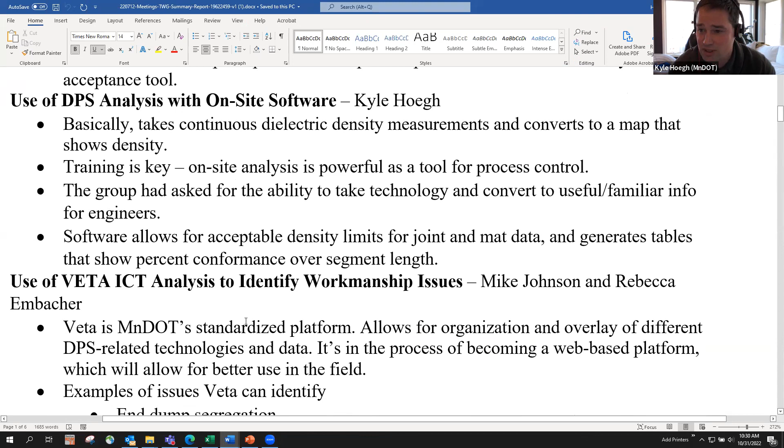I think I'm going to grab the screen very quickly and then we'll get into Brian's presentation. I did want to just really quickly go through some of the stuff we went over in our last meeting, as a quick reminder for the group. So this was our July 12th meeting. We had a lot of the same people here and went through some of the on-site software. Training is key, giving some examples of how the technology can be used to actually fix some workmanship issues, which is really one of the major goals of this technology, to help us get information to the contractors when they're building the pavement to improve from the very beginning.

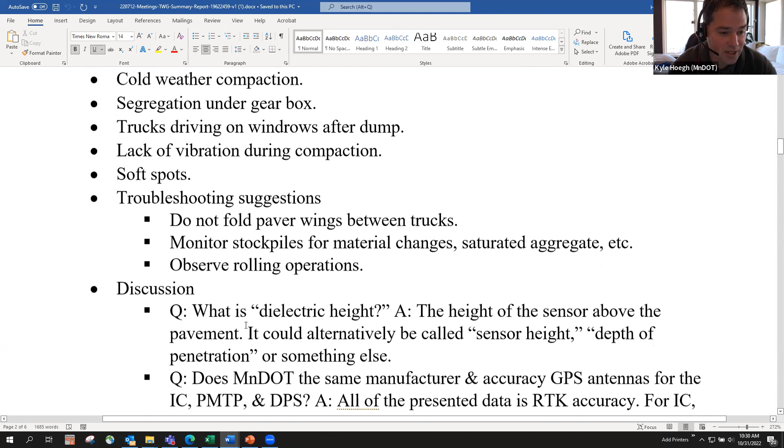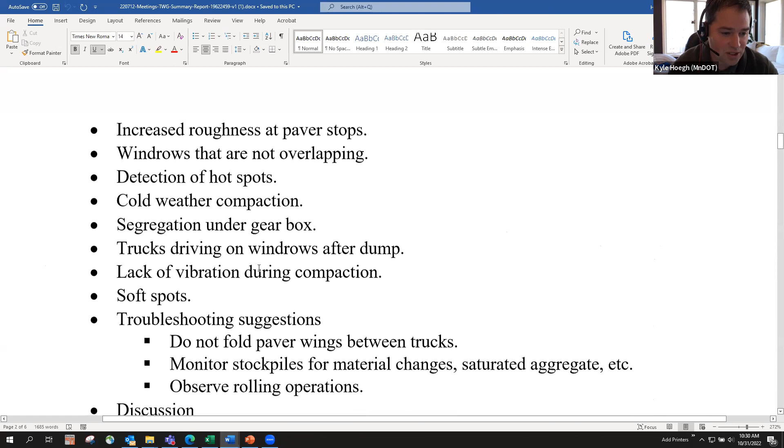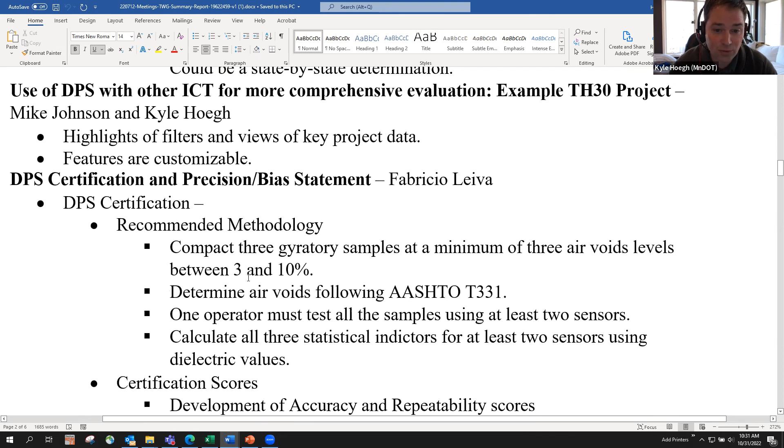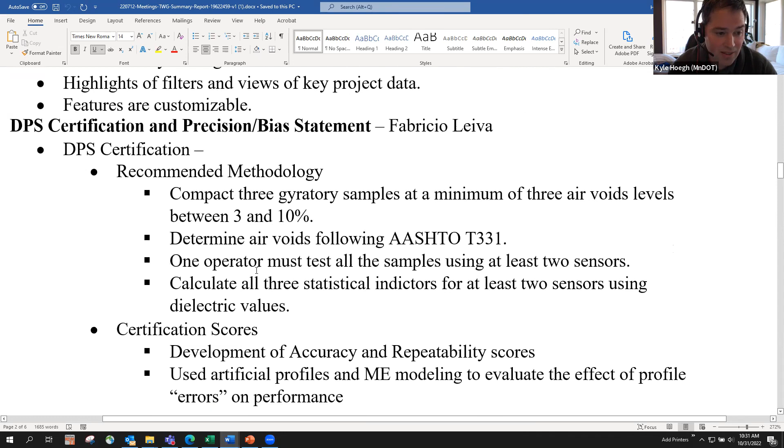And we also went through some of the more detailed applications using Veta software, where we can bring in some of the other intelligent construction technologies like thermal and intelligent compaction and things like that, and saw some really good examples and highlights of being able to identify what in the construction process was causing the low density locations and getting those fixed. So not those specific spots, but the operation that was leading to the lower densities. And then Fabricio actually did a great presentation on the DPS certification and some of the work he did at NCAT. And that's actually going to be a topic that Dennis is going to expand upon today.

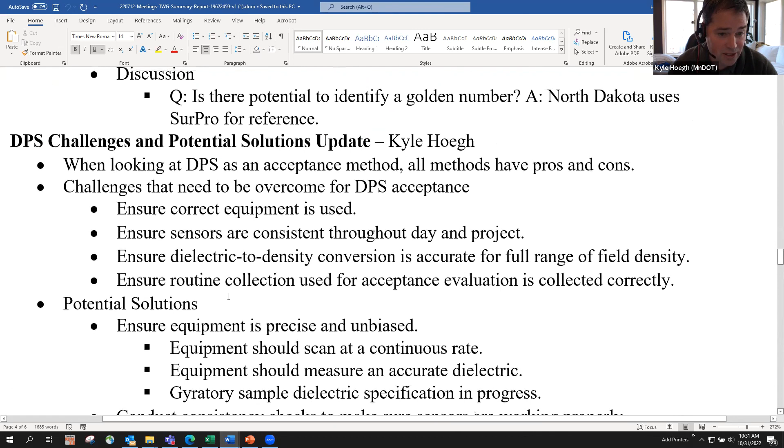And then we went through some of the challenges, and Robert Hinman also expanded on some of those and some potential solutions for this technology.

So, but we're already 11 minutes into Brian's presentation. We'd like to be as informal as possible while making sure people have their time. So definitely, Brian, don't feel rushed. We have some buffers in there for discussion and things like that. So go ahead and give your full presentation, Brian, if you don't mind. Thanks, Kyle.

I think I have some ability in here to help things along. So thanks, everybody. Thanks for the opportunity to share what we've been working on. Kyle asked me to talk a little bit about our initial evaluation of the DPS system, and the one we are using in particular is the one from GSSI. I'm also working with Hari Nair, who I think is traveling to maybe Salt Lake City today, but Hari and I have been working together on this project so far.

So a little bit of background about what we've been doing. We've got a decent history, I think, with GPR in general, a little more than 15 years using it for bridge surveys, bridge decks, pavements, things like that. Last year we purchased, using STIC funding from Federal Highways, so thank you to those folks, the RDM unit, again from GSSI. And we were able to do some testing on 5 field projects last year after getting that piece of equipment as part of a phase 1 study.

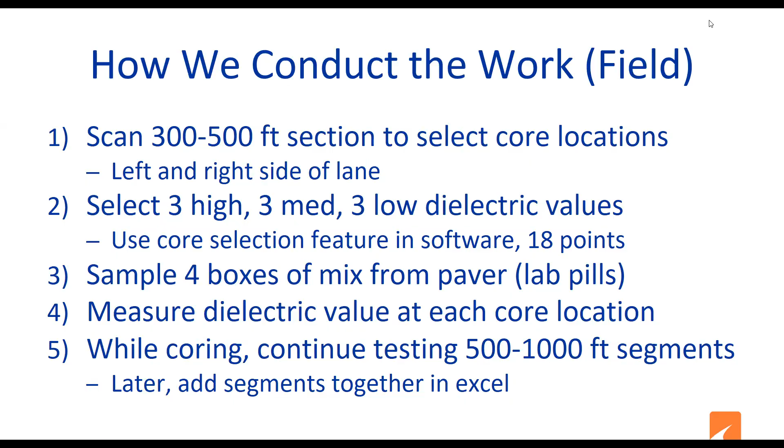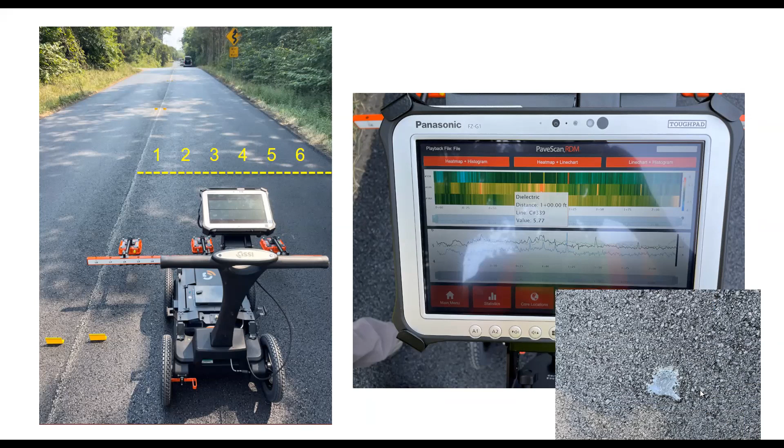So again, I think that's more of a phenomenon of when we're doing the testing. If someone were to come back and do the testing, let's say the next day, I wouldn't expect this to be a big deal. And it's really not a big deal for what we're doing, but just something we noticed within the data collection.

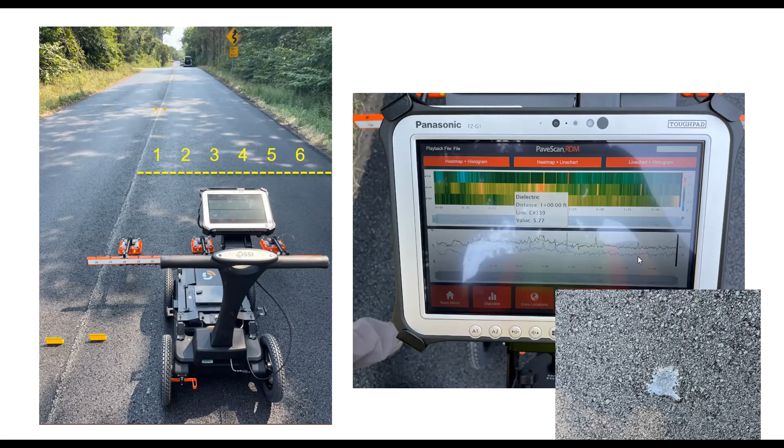So the next step, once we get back to the lab, we take each core and measure the bulk specific gravity according to AASHTO T166. So we're not doing the vacuum sealing method. We calculate the air voids using the daily Rice value from the plant, the GMM value. We get that while we're out there on each field project. And then we calculate the percent air voids and percent density from that. We plot the core dielectric value that I mentioned back in step 4 a couple slides ago versus the percent air voids.

It develops that regression equation that you've seen before. And then we plot, and this is what I've been calling a regressed density versus distance. And so another question that I have is what's the nomenclature everybody's using for this? Are you just calling it density, or are you calling it regress density? I've been calling it percent maximum regress density, but maybe that's too confusing a term, but terminology is a thing to keep consistent. So I want to make sure I'm doing the right thing too.

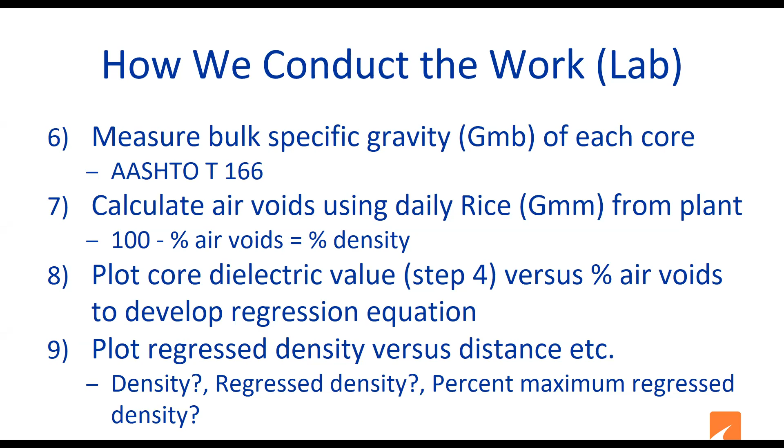This slide shows for 4 particular projects that regression equation. And looking at it now, I think I used the same scale for all 4 plots. So you can see where that regression line moves back and forth a little bit depending on the project. And so to me, the first thing that we saw from this is you certainly can't use the same regression equation for each mixture. Each mixture that we tested, we had different nominal max aggregate size.

I think we had 2 nominal max aggregate sizes across 5 projects, but we had different contractors from different areas of the state. And knowing we had different aggregate types, diabase materials versus limestone versus granite, I'm sure the dielectric properties of those are different. So that's why it's not too surprising to me that the dielectric value or the dielectric constant shifts one way or the other, depending on the project. So for us, that was kind of the first thing that we found, was that you need to set up this unique relationship for each project.

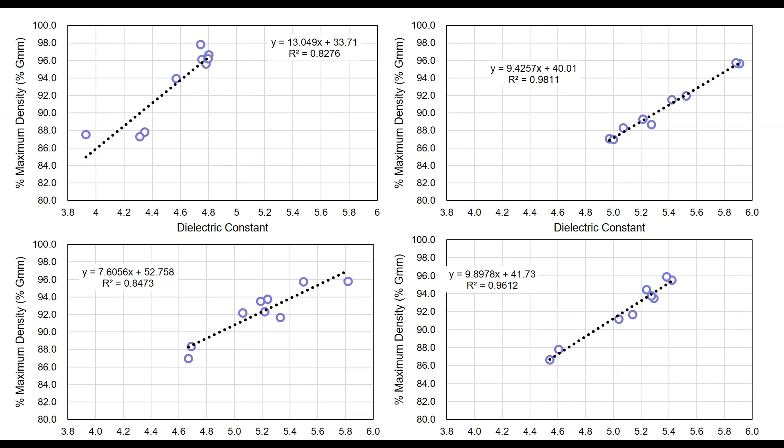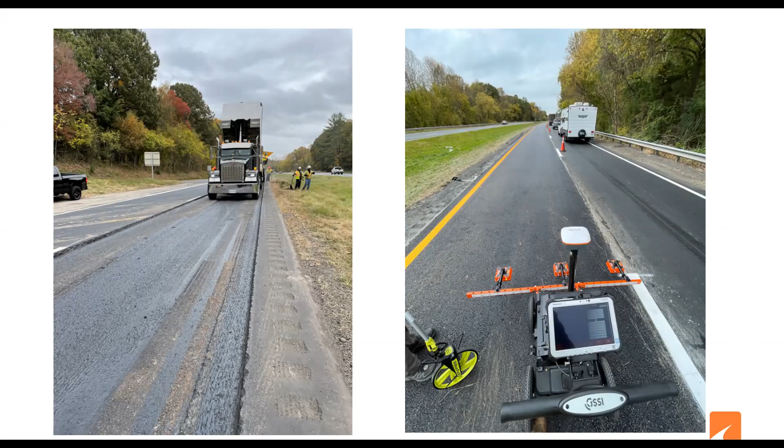And then in the picture there on the right, you can see pushing the cart up the right side of that particular lane. So in this case, again, both the left side and the right side were really on a confined edge. So the results from this particular project: again, we had 6 data points, or 6 antenna readings, going across the width of the lane from left to right, number 1 through 6, and this is how I've been able to keep it consistent, by trying to do this the same way every time.

You can see here, the green shaded lines are the left side of the pavement. The blue shaded lines are the right side of the pavement. So number 1 being the left edge, you can see is kind of in the middle of that distribution, with the average somewhere around maybe 92.5% density. However, you can see that the right edge is way down there towards about 89%. And this particular project was interesting because as we went along doing our segments, this trend was kind of the same throughout the whole project, or the part that we assessed. We tested about a half a mile or so.

And I walked over to the density technician from the contractor and asked him, hey, are you seeing this in the density data that you're collecting with the nuke gauge? He said, oh yeah, we're seeing it too. We've got a new guy on the screed, and every now and then he's starving the right edge of the screed.

And so that was kind of interesting to me, something that the contractor, had they had this data, probably would have been able to correct on the fly. I don't know how long the project was, but I'm sure this issue was probably consistent, at least it was for the half mile or so that we tested, but I have a feeling it was more than just a half a mile. So again, both edges were confined, but because of the operator on the back of the screed, we have this lower average density on the right side of the lane.

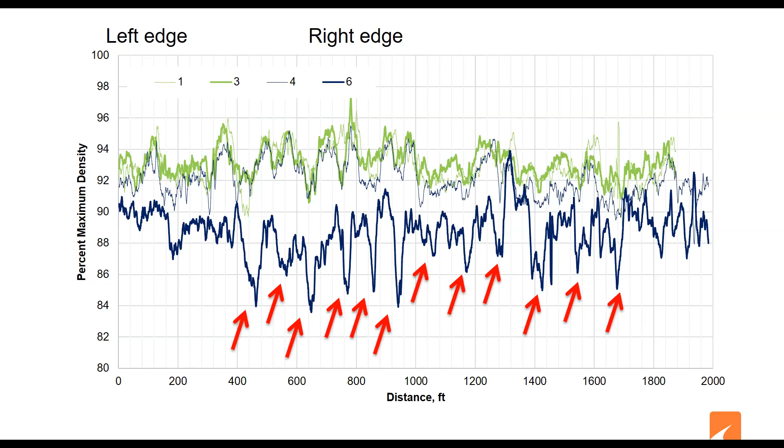So I think this is one of the things that Kyle wanted me to add, and unfortunately, Kyle, we hadn't quite gotten to it yet, but this is something we're actually starting this afternoon and for the remainder of this week: how we're going to include what I'm calling the lab component or the DPSL device. And so we plan to use that device to measure the dielectric values from the field cores, just to confirm what we expect to see, it being the same as what we had from the field DPS device.

We plan to fabricate lab pills from the loose mix that we collected during the paving. Right now we're looking at a 6-inch diameter specimen, 116 millimeters tall, compacted in a gyratory compactor. We're looking to estimate the mass to yield a series of pills of 4% air voids. And we're thinking we'll probably also compact some pills to 2, 7, and 10% air voids. But I've got a question mark on there because we haven't done it yet.

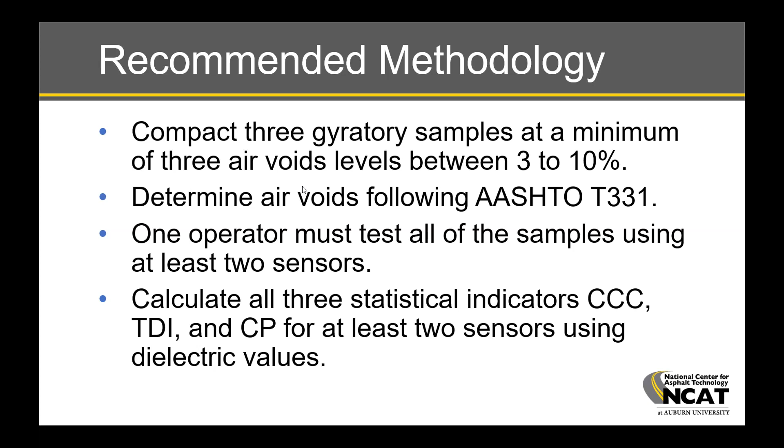And in addition to that, to have a tool that could give us an indication of, again, the variability from the equipment and operators, we also found that this could be used to compare sensors and potentially identify if one of the sensors is biased with respect to the others. We did this with 6 different sensors.

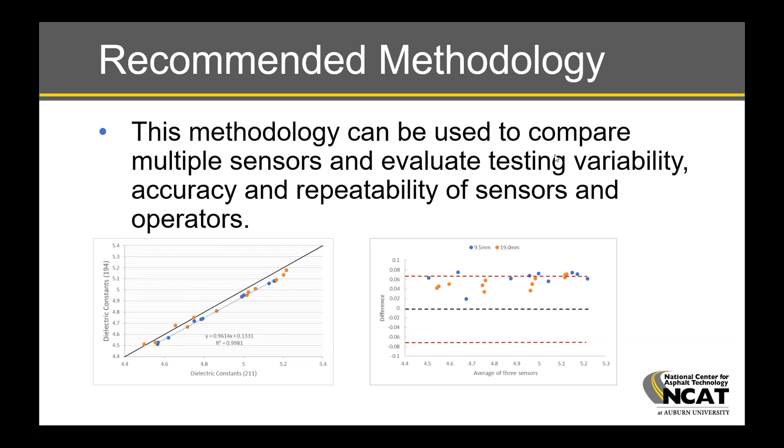Sure. Fabricio, I might start out and remind everybody, basically all states have a technician certification qualification program that they currently do for the Superpave gyratory, as far as compacting the specimens. So if a state was to use the process that's recommended here, where you compact gyratory samples at various air void levels, the only real difference is the amount of material that you're putting into the gyratory to get the different air void levels. The rest of the process is very similar to what folks are already getting certified or qualified on as a state, depending on the terminology the state's using.

Second thing, at least to me, there's an AASHTO standard R61, a standard practice for establishing requirements for equipment calibration, standardization, and checks. That standard really defines this type of thing as more of an equipment check or sensor check, that you're checking to see if all the sensors are getting similar results. It's not really a laboratory qualification process. That doesn't mean it's not valuable. It could be valuable to make sure all the sensors you have can give similar results.

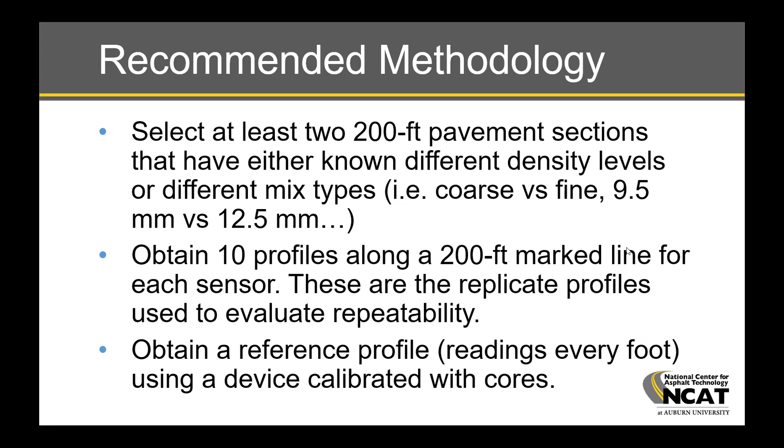I guess another question that we had is how often, and who should be doing this, and the recommendation is basically, if there's going to be something that has to be calibrated annually, having a reference center similar to what we have for inertial profilers. And I think I had a slide with how you actually recommended doing that with a couple CSV files.

Yeah, there was a tool that was generated. It was something simple. It's just basically having a reference profile and then having 10 candidate profiles, and the tool is going to provide us with a score that tells us if it is reproducing something close to the reference profile, and how repeatable those 10 candidate profiles are. Thank you. Anything else that you want to add, Fabricio? No, I think that's what I have at this point.

Well, thank you. I had some similar questions. I might start out by reminding everybody R56 with profilers was developed because profilers are also used for high-speed pavement management or asset management data collection that's used to determine in many states what the construction program will be like for asphalt overlays and other work, as well as reporting information to Federal Highway from an asset management perspective. So there are a variety of things going on behind that standard, besides the project level acceptance that's being used for smoothness.

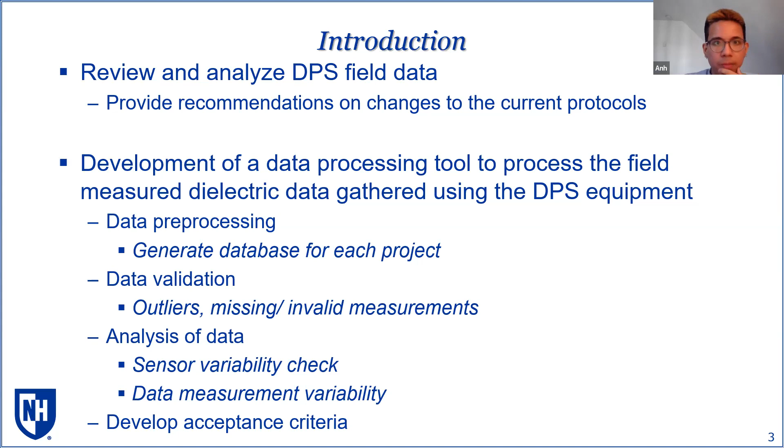So here's some of the important notes when using the tool. First of all, the data file and the processing tool need to be in the same folder and open at the same time to reduce the running time. And when using the tool, you will see that there are green cells and pink cells. The green cells are required to be filled before any action takes place, and pink cells are optional.

So right now for the tool, you need to do some of the data pre-processing steps, and I am not gonna go into detail on these to save time. But Kyle will share a link with the tool and all the files, and this presentation as well, which will include all of this information.

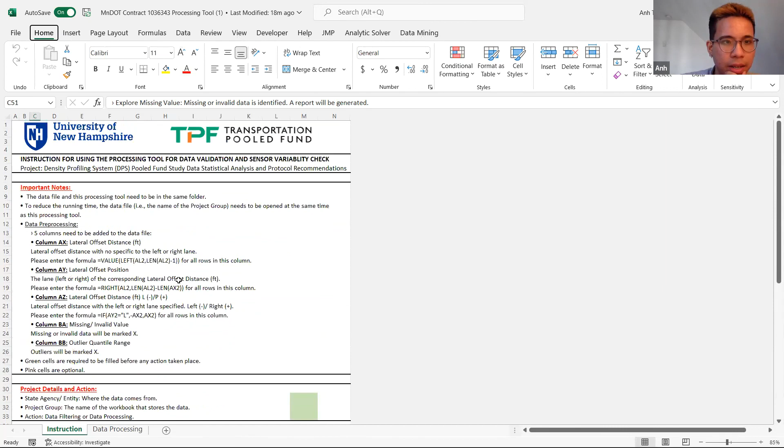Okay. And now I am gonna go to the tool itself. So this is the tool. The first tab is just some information about the tool and all the functionalities. Then in the data processing tab, the first input module that you need to fill in is the state agency where the data comes from, and a project group, which is essentially the file name of the workbook that stores the data, and the kind of action that you want to do.

So right now there are two types of action that you can do: data filtering and data processing. When you click on each of them, a row for each kind of action will appear accordingly. So first we will go through data filtering. This is essentially where you can filter all the data.

The purpose of having this functionality is that when you have a lot of data, this will be very useful to go through all of the data and apply the filter accordingly. So to use this, you need to specify the sheet index for filtering data. This is where you input a tab index of your workbook. You can either choose to apply the same filter for all the tabs, or you can specify a tab index that you want to apply the filter to.

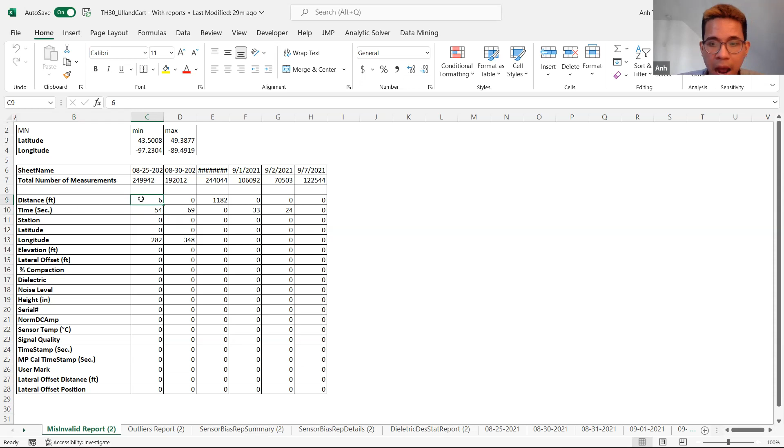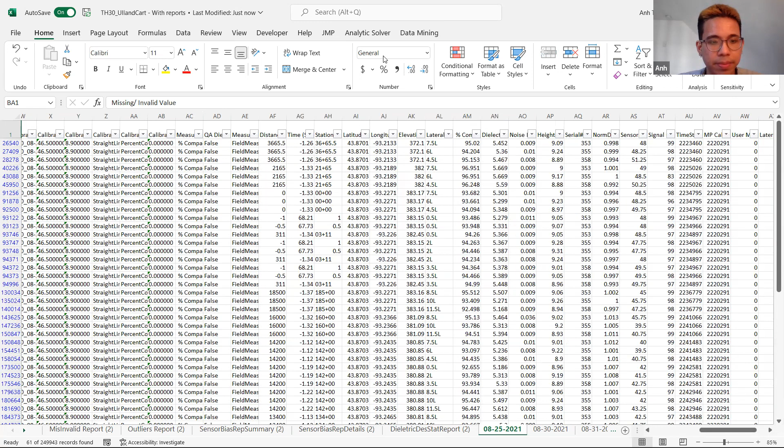When you go to the tab itself, for example, here you can see there are 6 rows of measurements that have some kind of problem with the distance measurements. When you go to this tab, all the way here, there is a column for missing or invalid values. Whatever rows have some problem with the measurement, the program will mark an X on those rows right here. It shows you which measurement rows have a problem, and then you can determine whether you need to fix those measurements or not. Okay.

The next one in this module is explore outliers. This essentially identifies outliers in your data set. The method we use to identify outliers is called quantile range. In this method, the quantiles of your data set will be identified, and the default tail quantile is 0.25 and the Q multiplier is 1.5.

The tail quantile is 0.25, which means it will identify the quantile values at each 25%, and then it will apply the Q multiplier to find the threshold of your data set, and any values outside this threshold are considered outliers. You have the option to change these two values as needed. As you can see, these cells are pink, so they are optional.

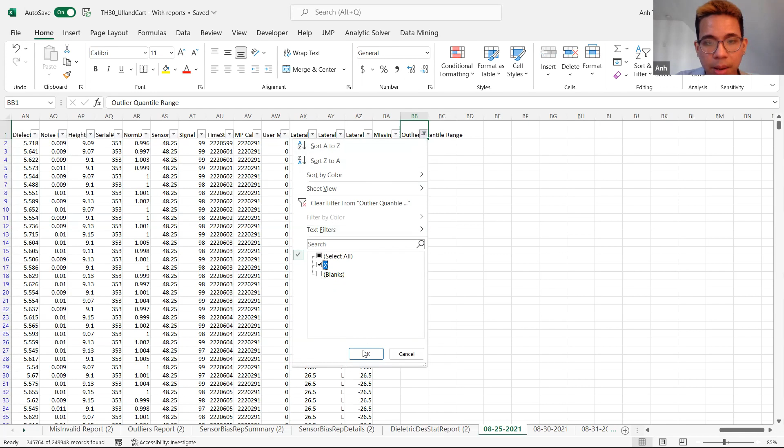Similar to the missing or invalid report, when you go to the data tab there is also a column. The program will mark an X right here for any measurement row that it considers an outlier using the quantile range method. And then you will have the option to remove these measurement rows from your data set before you do any further analysis. Okay.

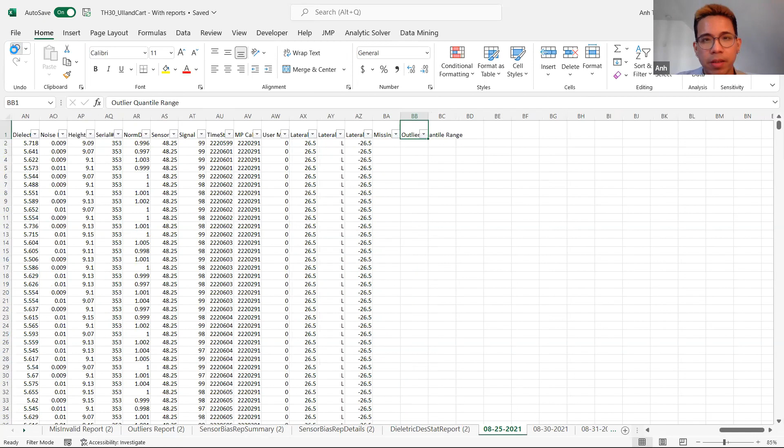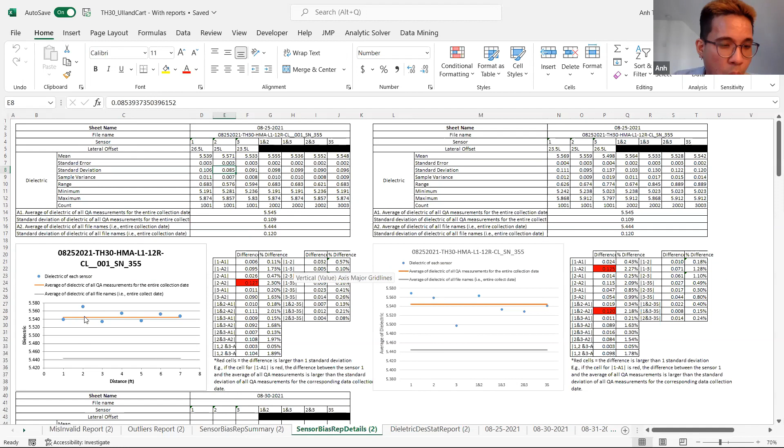And then in this table right here, I just compare the measurement averages of the sensors to each other and to all measurements. And in the report, you will also see some red cells, which indicate that the difference is larger than 1 standard deviation.

So for example, this cell right here is red. This means that the difference between the average of the second sensor for this file name and all measurements for the entire data collection date is larger than 1 standard deviation of all measurements for that data collection date.

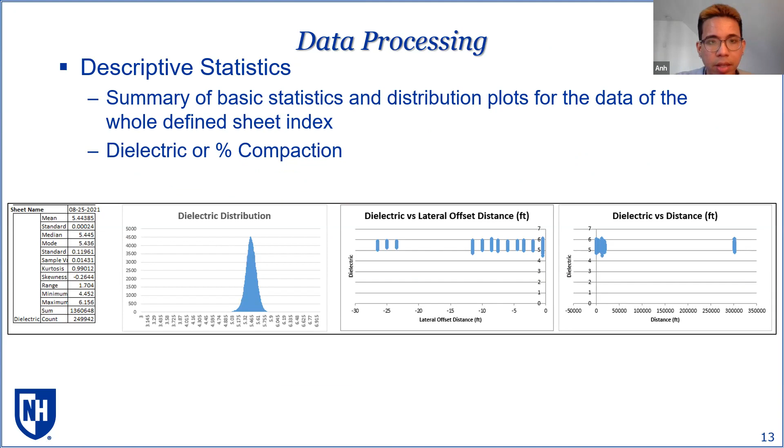These slides right here just go through each functionality, and this will be included in the folder that Kyle has shared in the chat box, so you can check this out later. And so, work in progress. Currently we are working on the data pre-processing.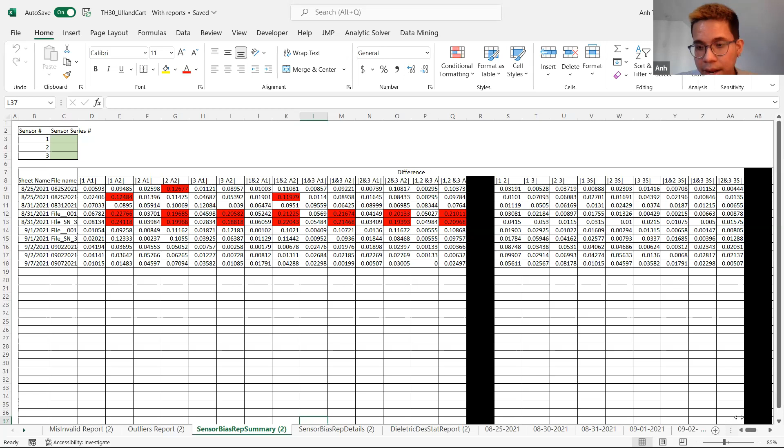This includes, as I mentioned, a functionality to generate a database for a project. What this does is it will generate a database right here that includes the data for all the data collection dates. And another functionality is the data analysis of measurement variability.

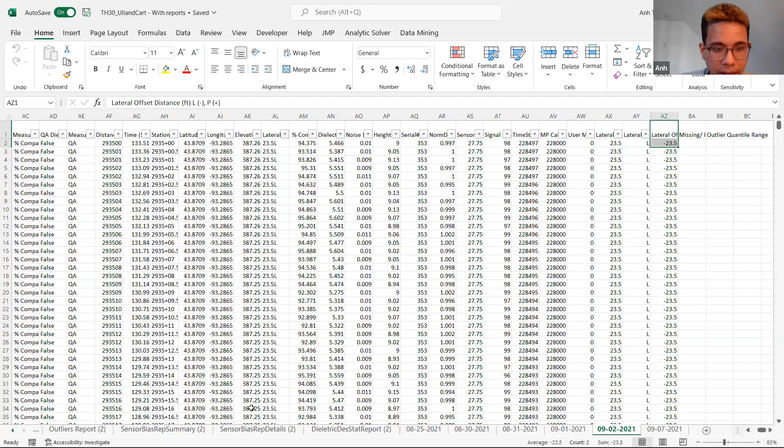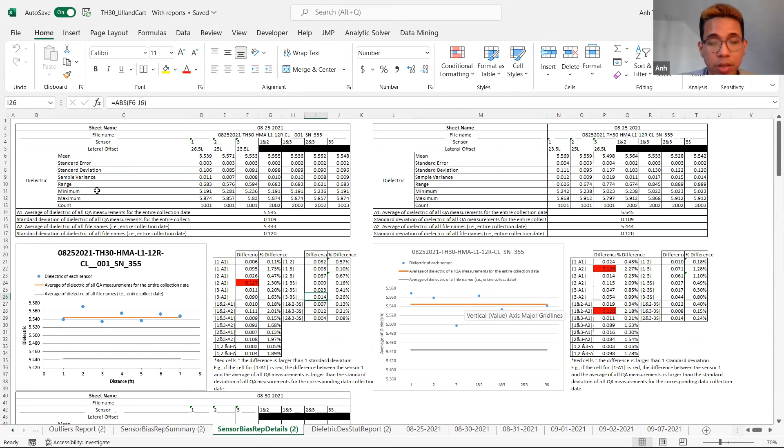What this does is it will generate a report like these that will compare the measurements of the various test section lengths to each other, to the entire test section, or to all measurements. And then you can use these reports to determine the suitable amount of testing you need to provide reliable measurements for different purposes and the associated uncertainty.

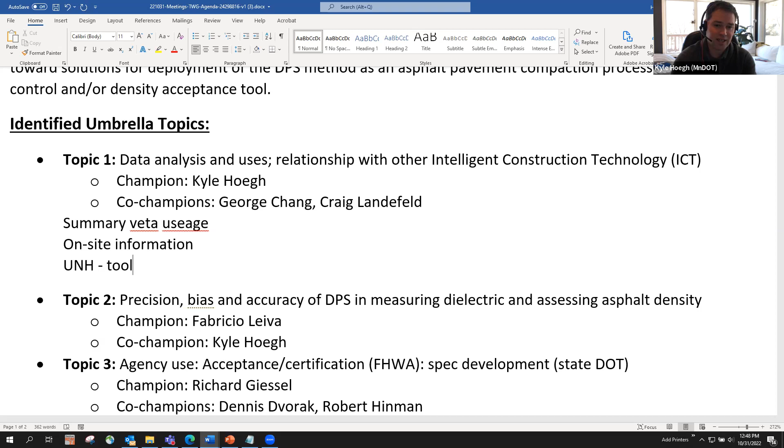Again, we're going to hit on this in one of the short presentations, but on-site information that you can get from the technology, and that's kind of those percent conformance tables and looking at the scatter plots to see low and high density locations, and then of course touch on the UNH tool from a data analysis and its relationship with other intelligent construction technologies.

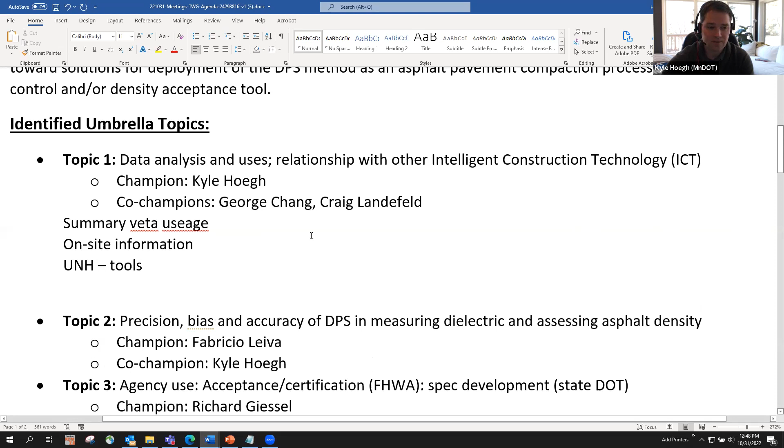Are there any other major or minor topics that somebody would like to either bring up themselves during the meeting in the winter, or would like me to bring up, or somebody else to bring up during that meeting as a report out for topic one? Our last meeting was pretty heavy on the data analysis also.

Kyle, has anybody else looked at using the DPS data along with infrared yet? Yes, and that's part of the summary of Veda usage. Those include examples of comparing it with paver mounted thermal profile. There's examples comparing it to intelligent compaction. And again, I'm not going to spend too much time on the report outs on that, because I know our MnDOT presentation will show a lot of those examples.

And then I've seen one of the contractors' presentations, who's also going to be showing some examples from a contractor perspective of comparing DPS with thermal. But yeah, that'll definitely be included. That's a good point to bring up, Brian.

Any other thoughts on what we've been talking about these last few meetings from a topic one perspective that we need to make sure we report out? Craig, any ideas that I missed? You hit the ones I was thinking about, Kyle. I mean, Veda and the IR stuff is what we've been kind of interested in and looking at the last couple months. Yep. Thank you.

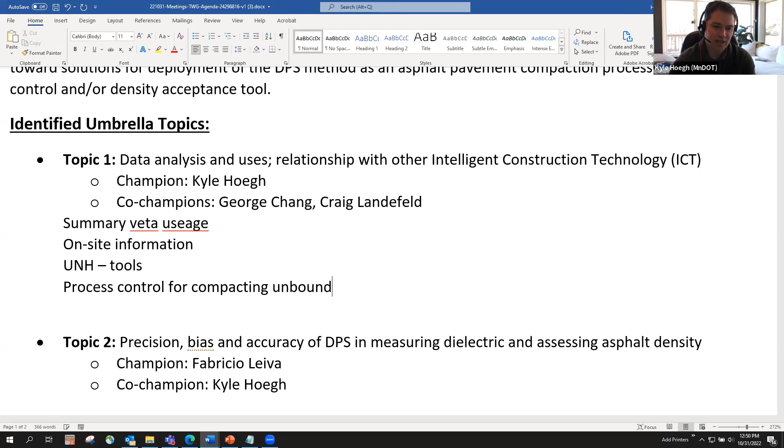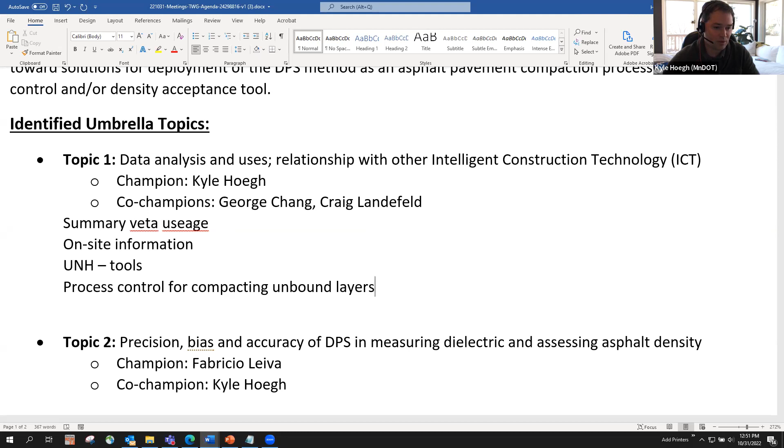Okay, so that I don't think we'll include for the pooled fund, but I appreciate you bringing that up. There are people using DPS technology for non-HMA compaction assessment. Another one I've seen is monitoring curing by looking at the dielectric and things like that. So I think it might be something worth reporting out that we've discussed, but it's probably outside the scope of what we'll look at with the pooled fund. Yeah, that's what I thought. Yep.

Thank you, guys. So with the precision, bias, and accuracy we've had, and then of course the certification type discussion, I know Fabricio has been leading that discussion, and he'll be giving a presentation to the larger group similar to what we've had with our technical working group to try to get some more feedback on that. And then of course, Dennis has been active in this. Is there anything other than the NCAT study? And then I'd also like to report out a little bit of our fiberglass results here for standardization.

And then, of course, the NCAT study includes both lab and field. And this fiberglass is for daily field use. Any other ideas for reporting out that we've had discussions on that any of the members or any of the group can remember or would like to see?

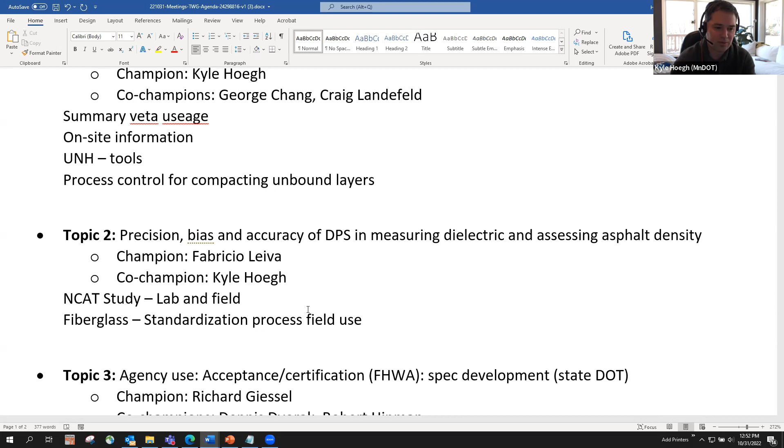Kyle, I don't know if Leslie and her team will be at this meeting, but some of the work they've been doing with the MATC, right? I know I've been part of Mississippi and Florida and stuff like that. So maybe we want to include some of what we've seen in the field with the trailers, and then some of the work that the Turner Fairbank NDE lab is doing. Of course, they were working closely with NCAT and their samples, but maybe a brief FHWA report out on some of the things we're working on would be something good.

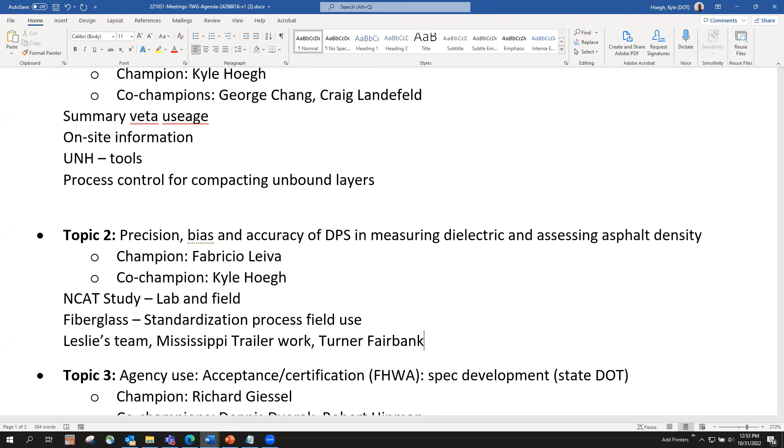I like it. And I think maybe what we'll do there is let them touch on the big picture view here. And then I think they have 15 minutes, and I don't know if they're able to make it in person. Monica, you do have a 15-minute session, or the Federal Highway does, to report out some of that stuff too. I just saw Steve's comment too. He said FHWA has a separate time for that on the agenda. Okay. Yep.

But it's okay to still touch on these things, because the whole goal of these report outs is to make sure we're looking at what we're accomplishing currently through the pooled fund, and then seeing what we want to do moving forward. What are the needs and how we can accomplish those things. So

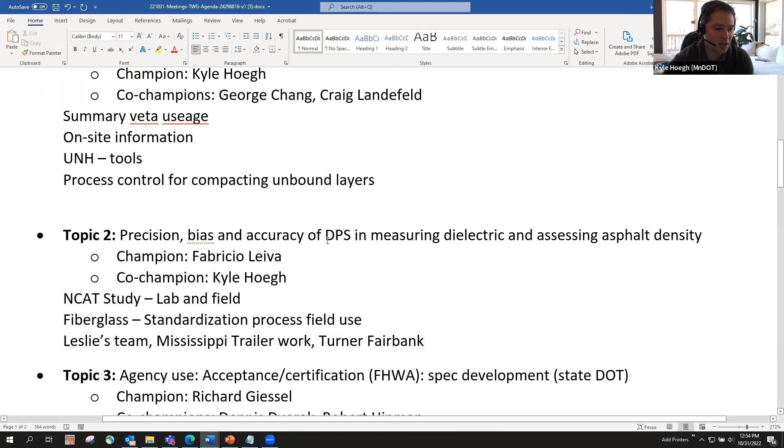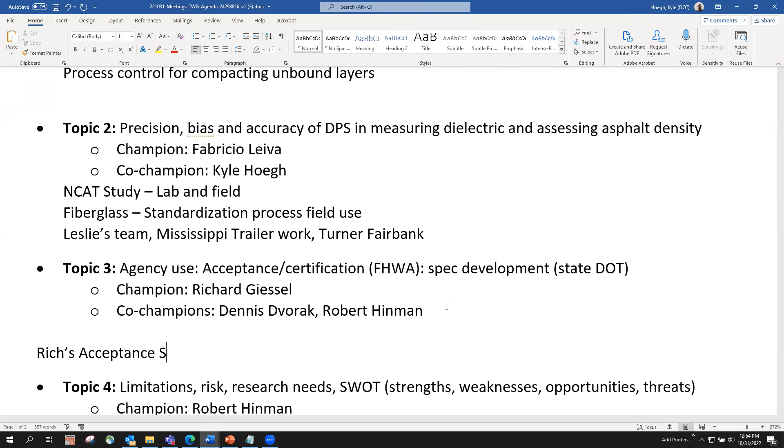if there's no more comments on topic 2, topics 3 and 4, I know Rich has shared his specification, and I think that's a good idea to report out to the larger group about Rich's acceptance spec, and all these things. Having an hour total, we'll just want to be sharing the big picture, what we've been discussing as a group, not necessarily having individual presentations throughout this.

So I also thought the discussion surrounding use of DPS as an acceptance tool, or I don't necessarily want to say QC tool, but using DPS in a way that's providing useful information to the contractors and to the road builders, even prior to it being ready to be used as an acceptance spec. So I don't know exactly how to word that, but I'd like to present to the larger group the idea that you can get good use out of DPS even prior to having a full scale, this is the data we're using for density acceptance.

So maybe, for lack of better words, unless somebody else can come up with something better, QC as a bridge to use for acceptance. And my thought process there is that we've had a lot of discussion about how it can be used to help with our paving operation decisions.

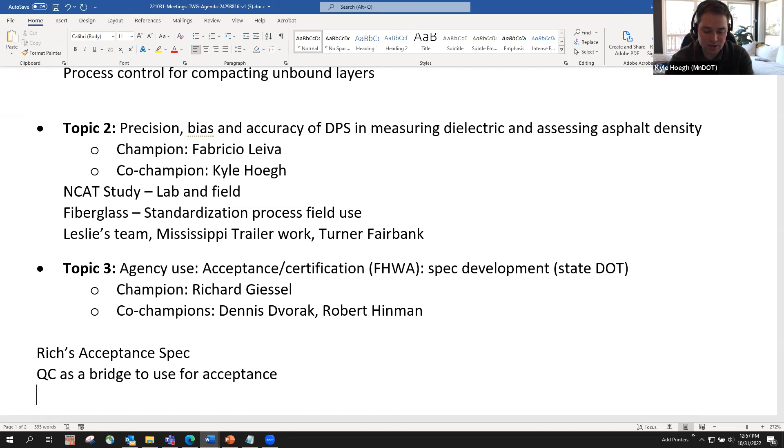And then of course, Harold may have some information here that he'll want to pass on to somebody to share, or maybe he'll be able to join remotely. And NCHRP, I'll just put information. Any other thoughts here?

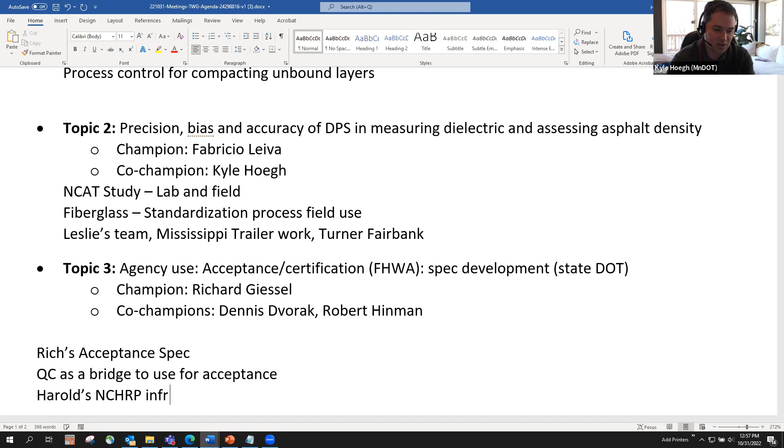Kyle, this is Dale again. On the QC part, are there some examples out there now where contractors are using the information? That'd be great to see. Yeah. So I was thinking here I might highlight, our latest DPS digest was showing how the comparison with the breakdown roller caused the change in construction practice that improved some issues we were having near the center line joint of echelon paving.

Okay. Things like that, would that be helpful? I saw that digest. I thought that was great. Yeah, that's a real good example. Yeah, I think that'd be real important. And of course, there's others, but some of those, just so people have an idea, because it'll be hard to convince people to use the technology if it's not actually being used to affect paving decisions out there, of course.

And I know we're kind of speeding up here at the end, but I want to make sure we at least get to topic number 4. Again, Harold's NCHRP information on strengths, weaknesses, opportunities, threats. Robert's been out sick today. His whole family's sick, he said, but he put together a spreadsheet with some of the strengths and limitations of the technology. So we'd probably want him to report out, or somebody to report out his information.

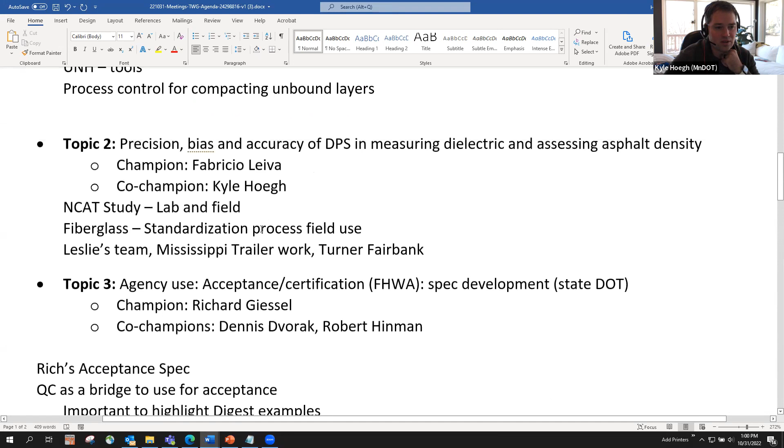Any other ideas for the SWOT limitations, risks, research needs discussion for the report out? Well, you guys have done a great job of providing feedback throughout the meetings, and CTC and Katie have taken great notes. So I think we'll have enough from the meeting notes that I'll start to compile some of the report out information, and then may just reach out directly to people if I need more information on a topic they've brought up, or ideally people who are attending would be able to report out what we've been discussing as a group.